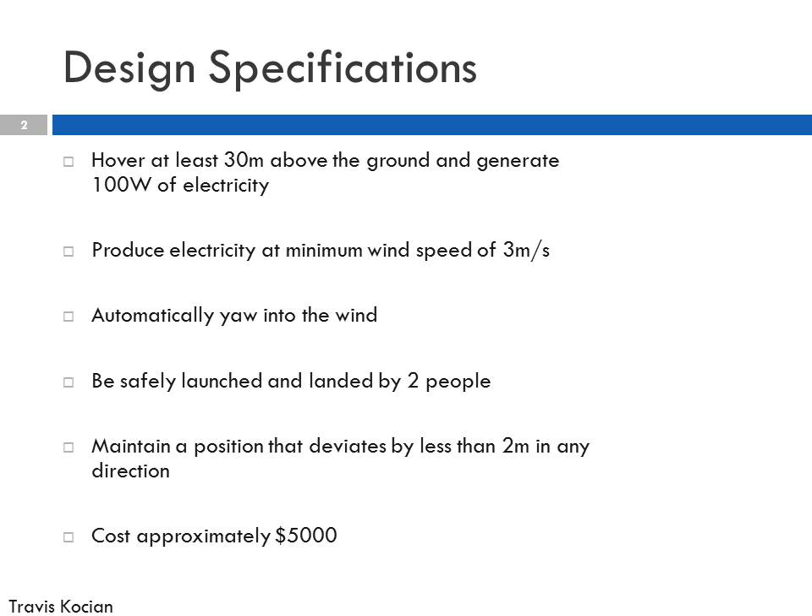The design specifications laid out for us were that we had to hover at least 30 meters above the ground and generate 100 watts of electricity. At this, we had to be able to produce electricity at a minimum wind speed of 3 meters per second and automatically yaw into the wind. This has to be safely launched and landed by 2 people and maintain a position that deviates less than 2 meters in any direction. The cost will be approximately $5,000.

So this is the mechanical design of our design.

The main components of our design consist of a connection piece, a weather vane, a mechanical equipment piece, pivot joint, pivot piece, weather balloon, rotor shaft, and rotor. The connection piece is the body of our rotorcraft, and is what actually connects everything to one another.

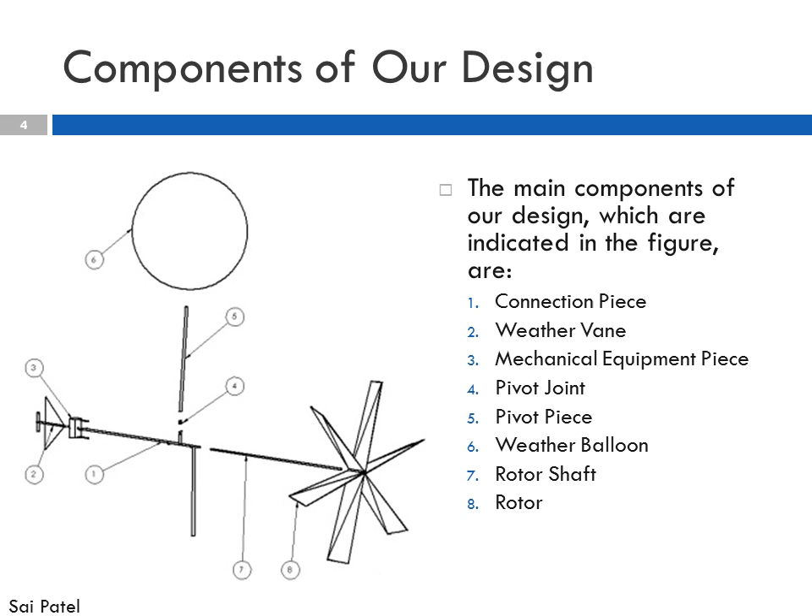The weather vane is what is used for the yawing. The mechanical equipment piece is what will be used to store the generator and other electronic equipment. The pivot piece and the pivot joint are a special feature on our design that will be elaborated on in the stability and characteristics part. The weather balloon is what will provide the buoyant force to lift our body, and the rotor shaft and rotor are designed to provide thrust.

The material selection for design components is as follows. The connection piece, pivot piece, mechanical equipment piece, weather vane, and pivot joint are all anticipated to be made out of lightweight aluminum alloy and be manufactured in-house, preferably out of a material commonly known as aluminum towel rod. The rotor will be made out of a lightweight carbon fiber and more than likely be manufactured in-house, but possibly can be bought off the shelf if we were able to find one to our specifications.

The rotor shaft will be made out of lightweight aluminum alloy, preferably one that's stronger and can endure more, and be purchased off the shelf. The weather balloon will be made of latex and be purchased off the shelf.

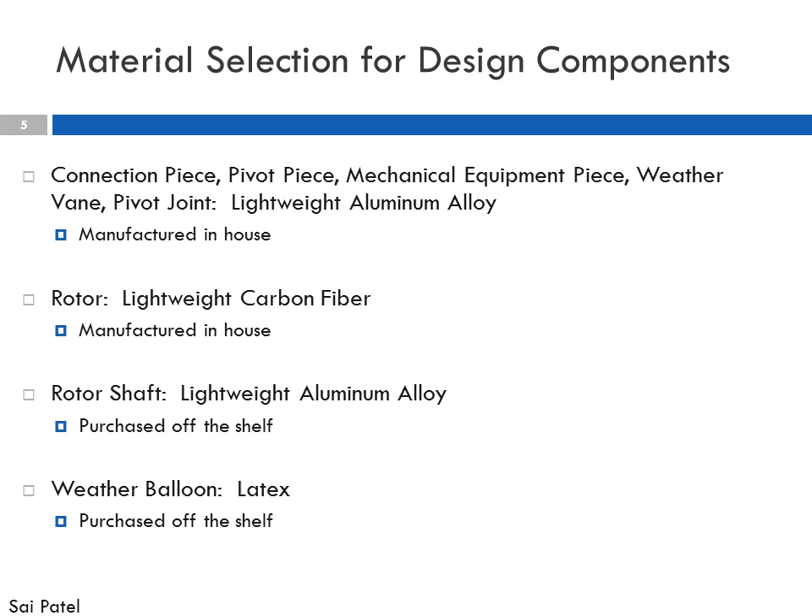The assembly of our design is accomplished mainly with the use of steel nuts and bolts. The mechanical equipment piece attaches to both the weather vane and the connection piece, which is highlighted in the picture. The pivot piece attaches to the pivot joint, and the pivot joint attaches to the connection piece, which is highlighted in the second picture. The propeller attaches to the propeller shaft, and the propeller shaft to the generator as dictated by the specifications from the off-the-shelf source.

The weather balloon slides over the pivot piece and is bonded with epoxy and sealed to ensure no leaks. In total, about 5 or 6 steel nuts and bolts are used as a highly efficient and cost-effective method of assembly.

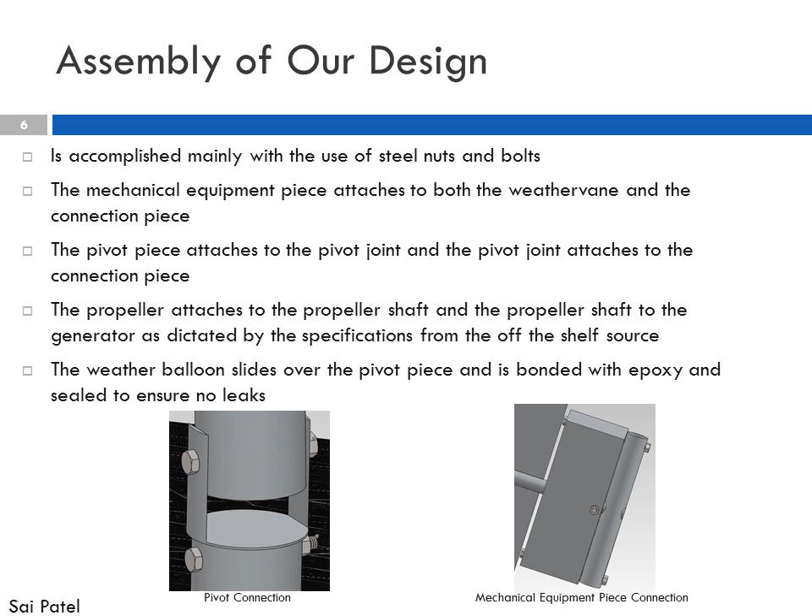In the structural analysis for our design, we used the technique of virtual work. In this technique, we assume the point where the 2 tethers attach is going to be fixed. A maximum downward force of 150 newtons was applied to each of the points, and a maximum 250 newton upward force was applied to where the pivot point attaches to the connection piece.

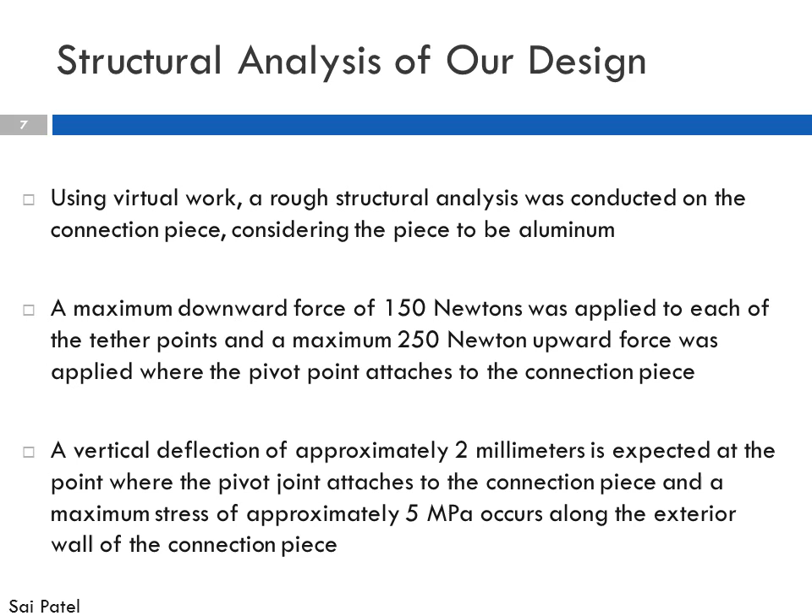Due to this, there was a vertical deflection of approximately 2 millimeters calculated based on the virtual work technique, and a maximum stress of approximately 5 megapascals occurs along the external wall of the connection piece. As aluminum has a yield stress of 95 megapascals, we assume structural failure will not be a problem.

So for the rotor aerodynamics, we developed our own blade element momentum theory code to iteratively design our rotor. At first, our first design for our rotor was a 3-blade rotor that had an extremely high rotation rate, I believe 180 rotations per minute. This was fairly high considering the size of rotor we were looking at.

We didn't want to deal with the dynamics of a rotor spinning that fast, and a lower rotation rate would help with shaft power losses. So we decided to go with a much lower rotation rate, but because of the size of our blade, we were looking at a tip-speed ratio of around 2, which is fairly low.

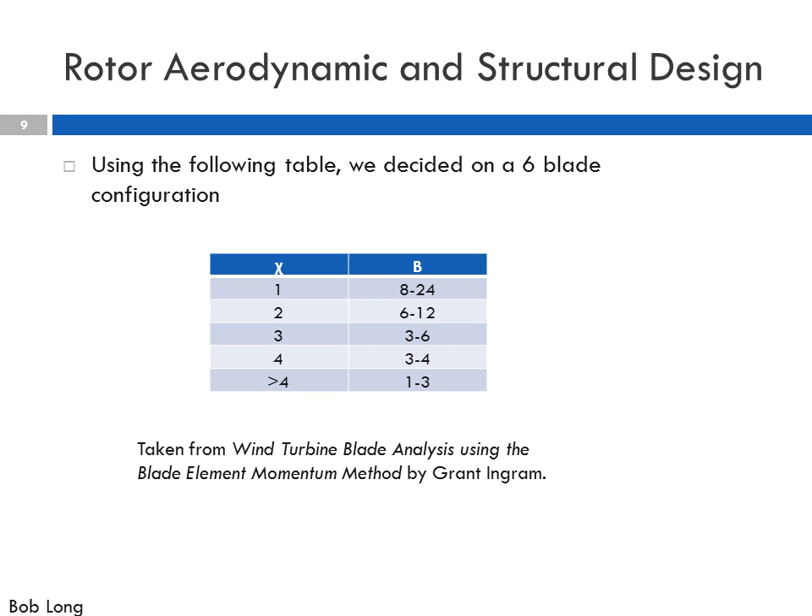So doing some research on wind turbine design, I found that with a tip-speed ratio of 2, a 6 to 12 blade design is most efficient, so we settled with a 6-blade design. I also found that at tip-speed ratios that low, you can use curved plates instead of airfoils, which make our rotor much easier to design.

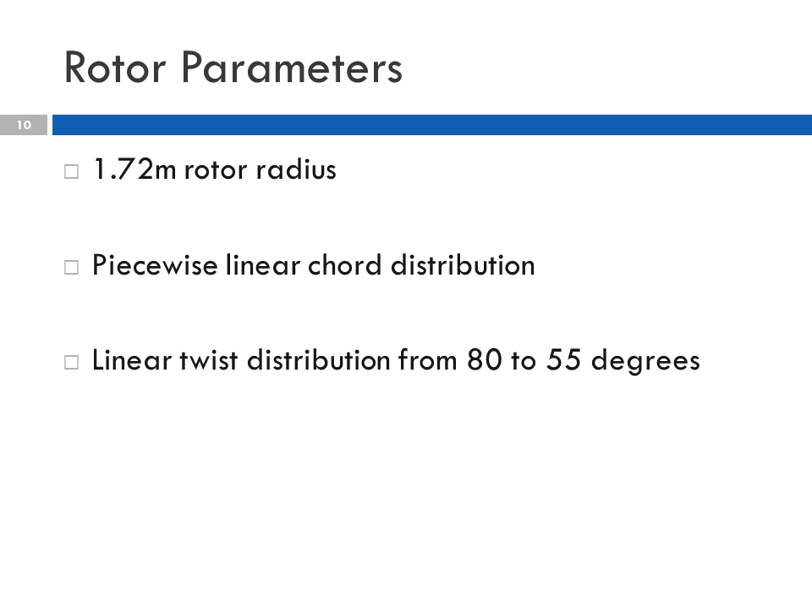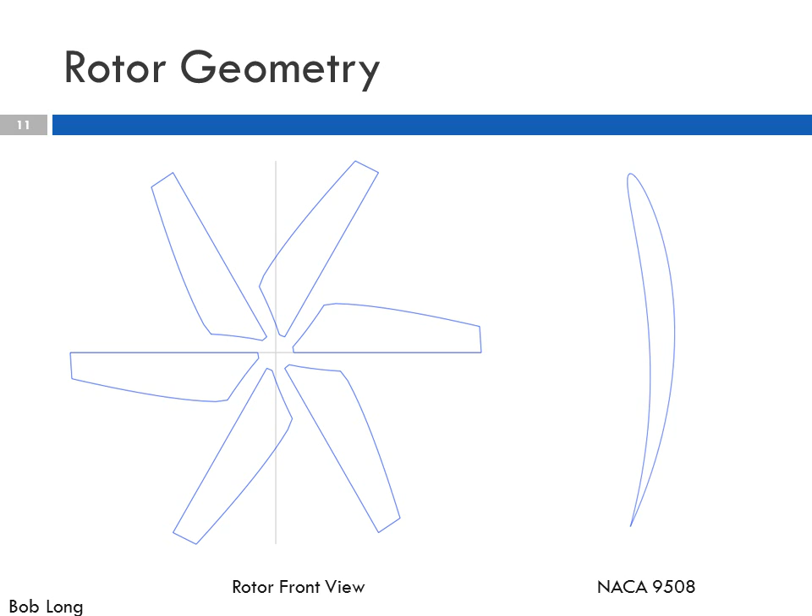For our BEMT, I used the NACA 9508 to estimate a curved plate because it was the easiest thing to find data for all 360 degrees angle of attack.

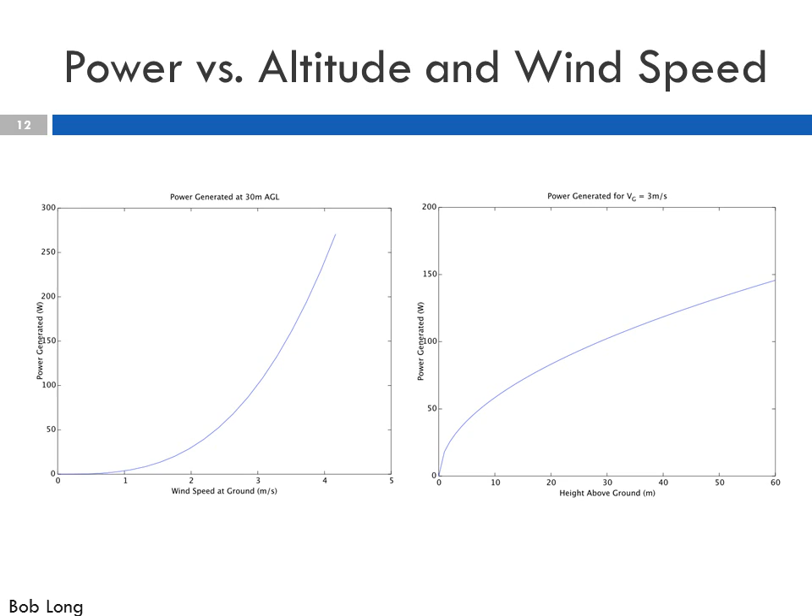From a stability and control standpoint on this project, there were two things that mattered. The first was designing a controller to control our aircraft. The second was to prove that with this controller, our vehicle was statically and dynamically stable.

First thing I had to do was build a mathematical model of the vehicle. Rather than simulating all 6 of the vehicle's degrees of freedom, which is time consuming both computationally and in manpower, I reduced it to 4. The most important two, inarguably, are pitch and yaw angle. If we have any misalignment with the incoming wind, we're going to see loss of efficiency. The other two I chose were altitude and distance from the tether point.

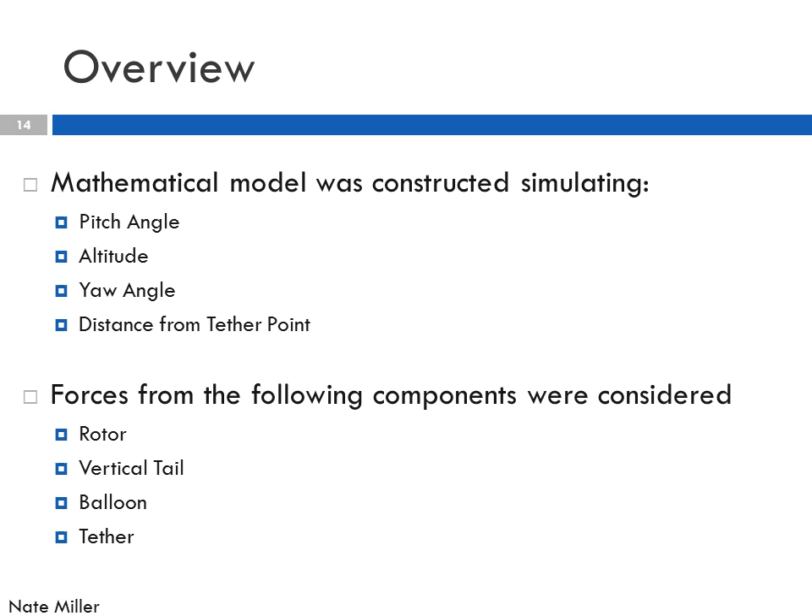You can think of that as how far downwind our vehicle has been blown from where it's tethered to the ground. I considered forces on 5 components: the rotor, vertical tail, balloon, and the 2 tethers. One tether is forward of the CG and the other is aft. This gives us pitching authority just by varying the tension on the tethers.

The controller was multiple input, multiple output. We had 2 outputs, so we can control 2 degrees of freedom effectively. I chose to control altitude and pitch. Each degree of freedom had its own PID controller.

The altitude controller controlled the tension in both of the tethers, so if we want to go up, decrease the overall tension. If we want to go down, vice versa. The other PID controller controlled the pitch. It set differential tension in the line. So to decrease pitch, we would increase tension in the foremost tether and decrease it in the aftmost.

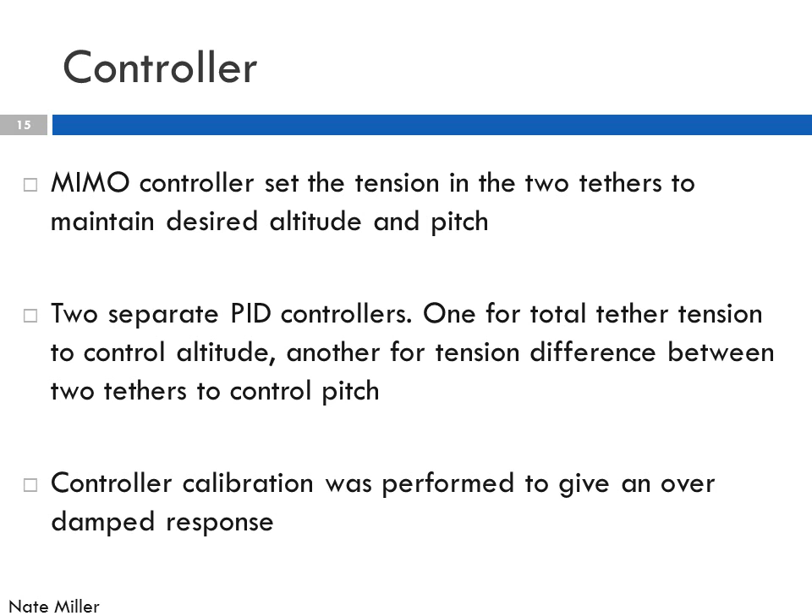All variables are steady state except for the wind heading angle, which shifts 10 degrees to the right at t equals 10 seconds. You can see on the top graph, the red dashed line is our vehicle slowly turning into this 10-degree change in wind. We have about a 90-second response time, which is what we anticipate you want for a wind turbine.

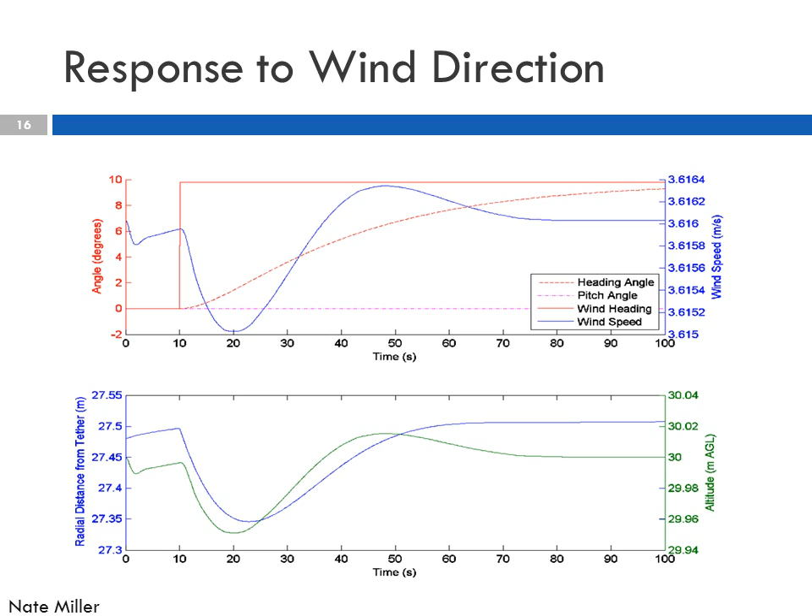The altitude controller keeps the altitude within our 2 meters from the set point as required by the RFP, and the vehicle is, as expected, blown downwind by this.

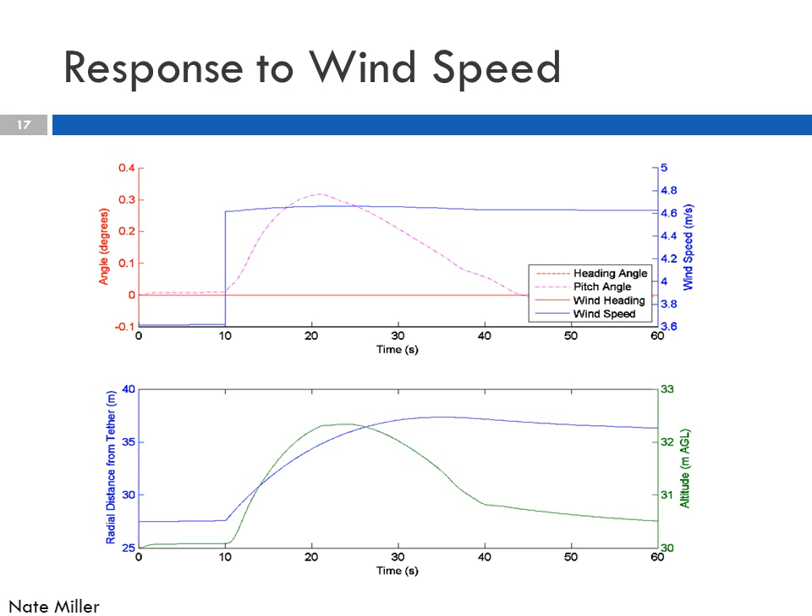Now, you may have noticed a hinge was introduced in the vehicle design, and this serves to decouple the drag on the balloon from the pitching moment. Right now we have a large bluff body attached on a very long arm to our vehicle. So if this hinge wasn't in there and we had a change in wind velocity, that would increase the drag. We've got a long moment arm, so we have a lot of pitching moments.

So we put the hinge in there so the balloon balances its lift and drag and contributes almost no pitching moment to the vehicle. Just doing some rough calculations, we're anticipating a deviation of 15 degrees from vertical, so there shouldn't be a huge deal with vehicle dynamics. And we're thinking about putting mechanical limiters on this hinge so that the balloon cannot flap forward and hit the rotor or flap back too far.

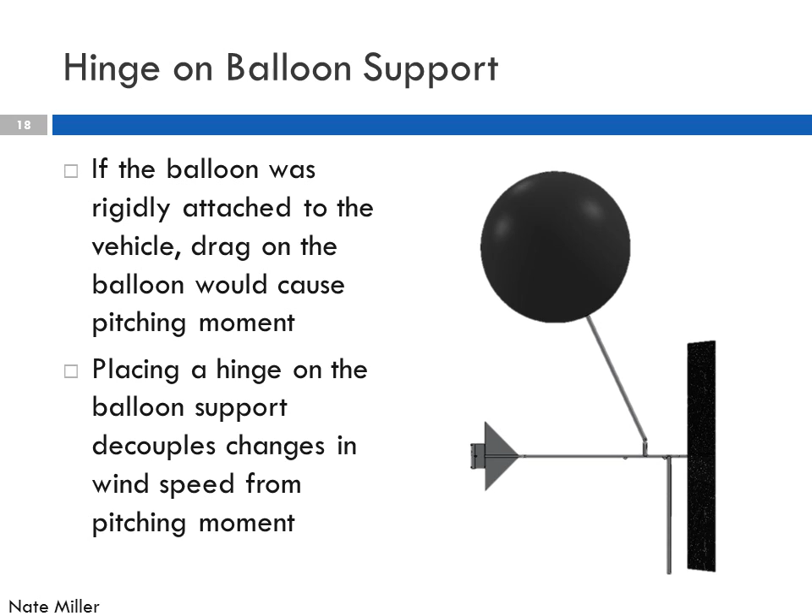Final part of the project was choosing a generator and then analyzing what kind of losses we're going to encounter with the alternator that we choose. We've chosen the WindBlue Power DC540 low wind permanent magnet alternator. It's ideal for wind speeds from 3 to 10 meters per second based on manufacturer testing, and it's capable of generating 100 watts at about 225 RPMs on the shaft.

Now, since our rotor is going to be operating at low RPMs, we're going to have some sort of a gearing system which enables the shaft to spin at higher rates than the actual rotors themselves. So here's an example: if you have a 3-to-1 gear ratio, you can actually get by with only having 75 RPM on the rotors and still maintaining 225 RPM on the shaft, and so on with different gear ratios.

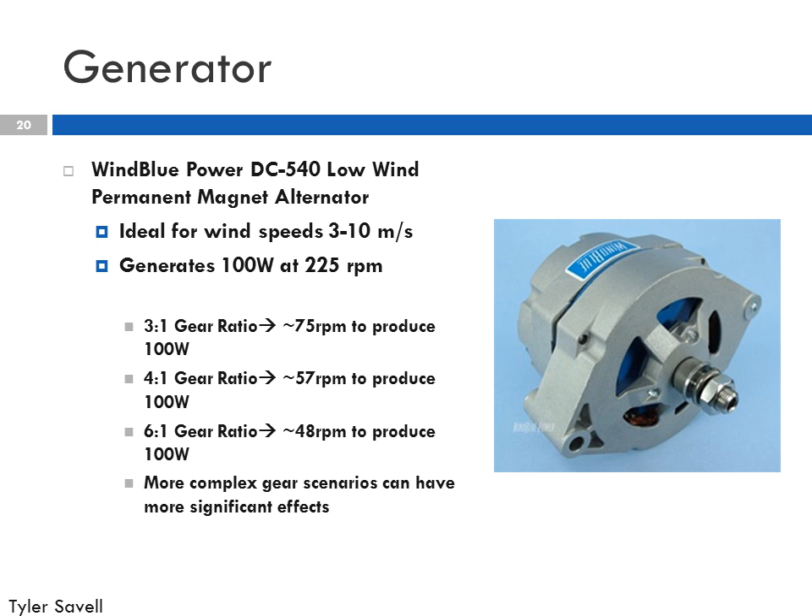There's going to have to be some testing that goes on to see which kind of gear ratio is the most effective, and more complex scenarios can be implemented to make this RPM the optimal value.

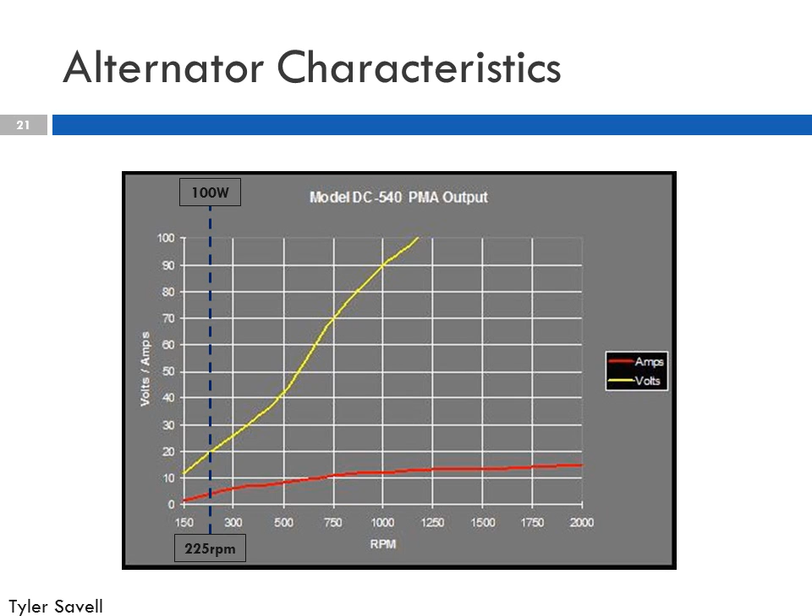This is an example of the power output based on the manufacturer's testing. The main thing to take away here is the dashed blue line, which shows that at the 225 RPM of the shaft, we can generate 100 watts of electricity.

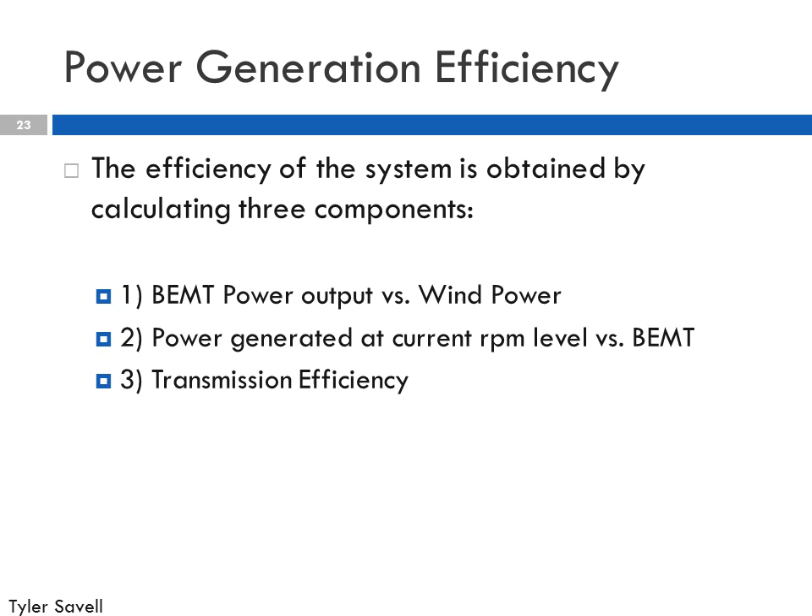Once we chose the generator, we needed to analyze what the losses are going to be and what kind of efficiency we're looking at from a power standpoint. We did this three different ways. First, we compared our blade element momentum theory calculations to the ideal wind power from the incoming velocity. Then we compared the power generated at that RPM level to the BEMT code. Last, we calculated the losses while transmitting electricity from the system, suspended in the air, to the ground.

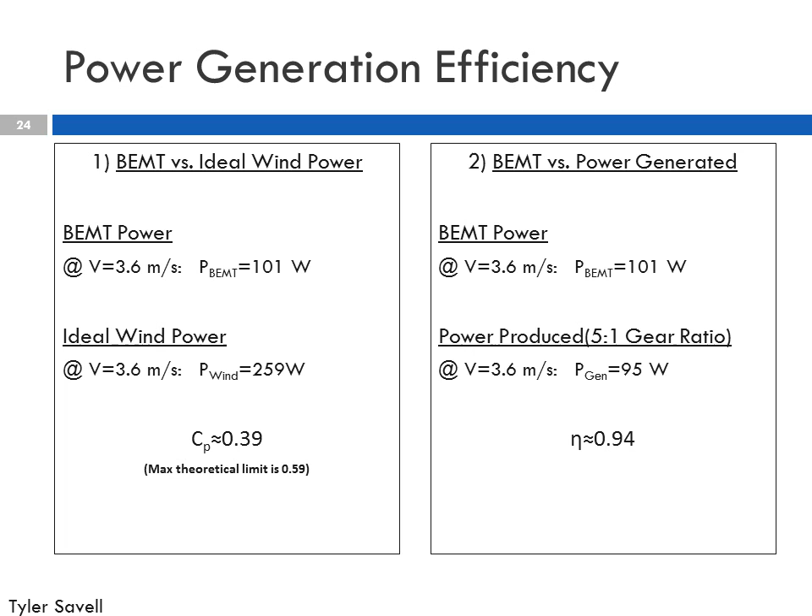Last, we needed to calculate the transmission efficiency through the wiring all the way to the ground. Basic 12-gauge wiring has resistance of about 0.0016 ohms per foot. We've got approximately 150 feet of transmission wiring from the system suspended in the air all the way to the ground. After doing some math, you find that we lose about 6 watts of power if we're generating 100 watts from the generator, so that gives us about 94% efficiency through the wiring.

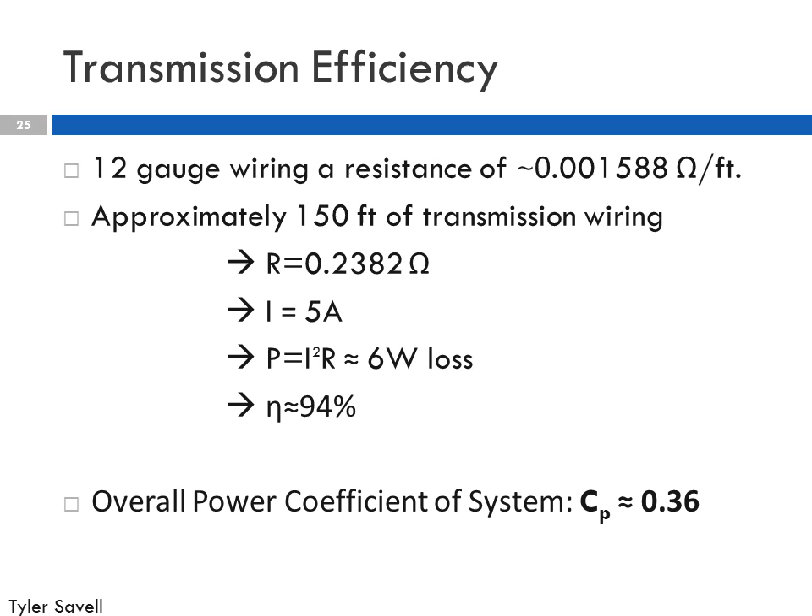So overall, if you multiply all three factors together, you find that the power coefficient is about 0.36. Again, considering that the maximum efficiency is about 0.59 and that our code actually accounts for tip losses, this is a significant result.

The rotor blades themselves, we estimated would be about $125 a blade. Now, this is if we were not to buy off-the-shelf blades. There are blades that could be considered flat plates or curved plates that can be bought off the shelf for a significantly cheaper cost, so our price point can be driven down by doing that.

Lastly, helium is pretty expensive. It's roughly $1.50 plus per cubic foot, and we're going to need about 600 cubic feet to initially inflate the balloon. It's going to run about $900. So the actual system itself is going to be right at our $5,000 price point. Once you inflate the balloon, it's actually going to be a little bit above that.

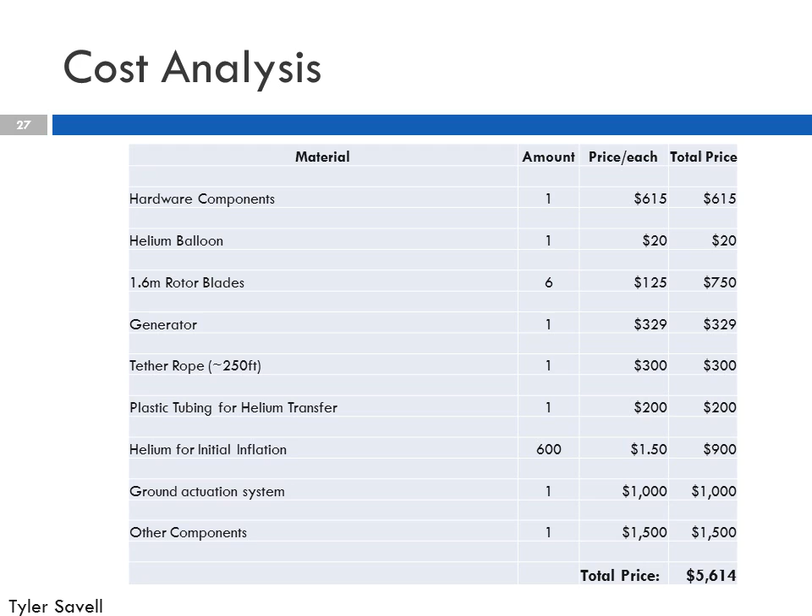These predictions don't include maintenance costs, life cycle costs, and such, so those would need to be considered if this design actually does make it to the next phase of being built. Lastly, like I said, you can decrease the cost by purchasing off-the-shelf rotor blades and also by having a simple ground actuation system.

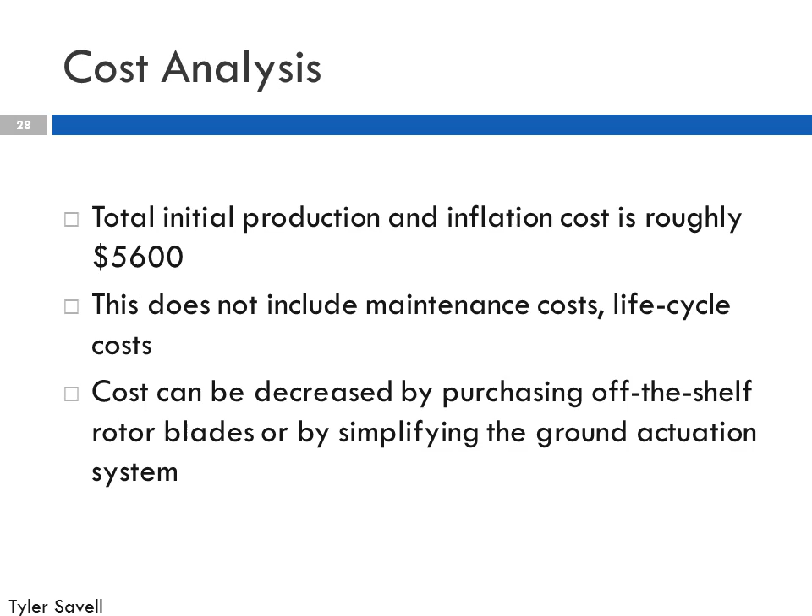Finally, launch and recovery. This is a pretty simple process. Basically, the ground tethers are going to initially be at the zero position. The balloon's then going to inflate slowly through the plastic tubing until the upward buoyant force exceeds the weight of the entire system. At that point, the ground control system is going to regulate the position and height of the design. Once it's at its operating height, the system will automatically orient itself into the wind just based on aerodynamics alone.

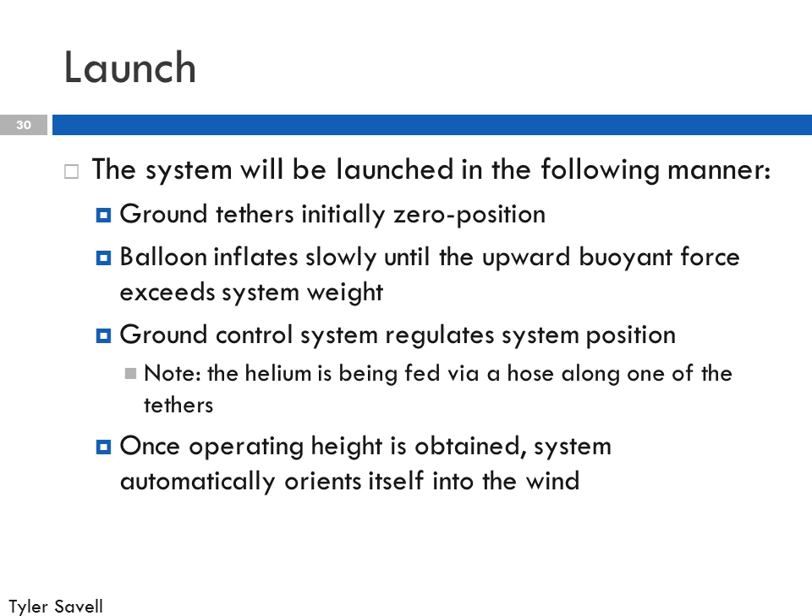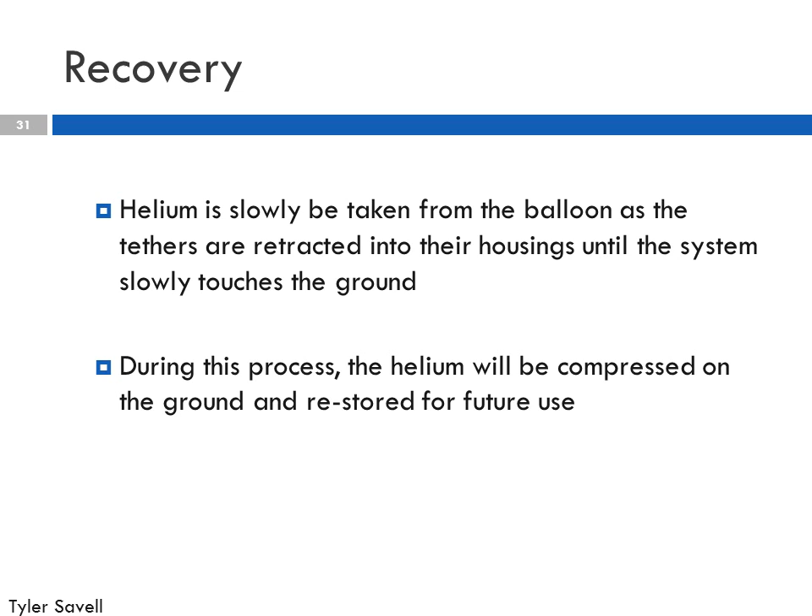That concludes the specifications for our airborne wind turbine design. Thank you for the opportunity to participate in this project.